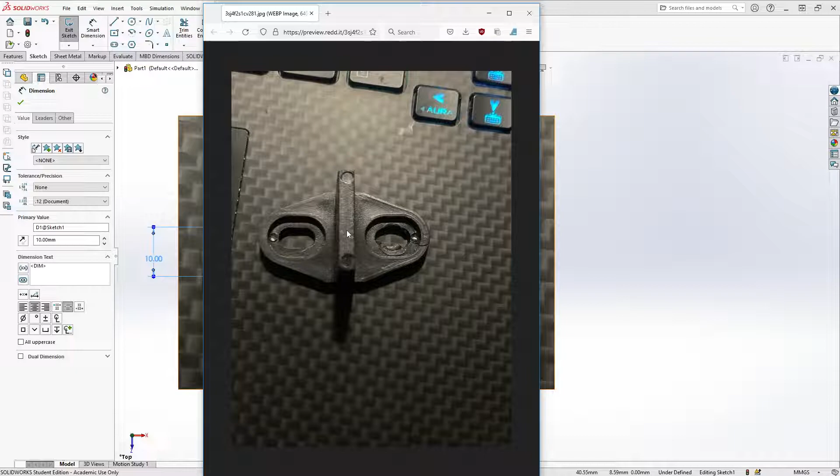And in Fusion there's a drawing tool that you can use to approximate a distance. The other suggestion is to take a picture more from on top, or even better on bottom, because you can measure what it is. And then what you also need are digital calipers.

So like something along these lines - not this one though, because that one sucks. This is the one that I bought twice. As you can tell, I've bought this one twice.

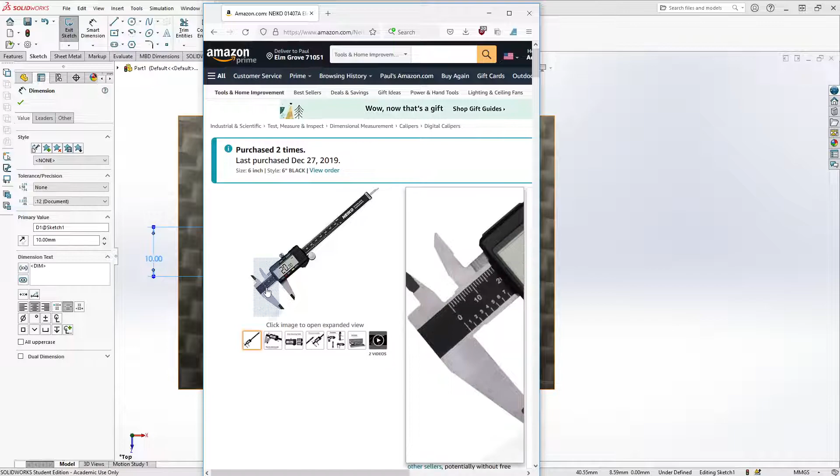But yeah, so you measure these things, and that way, whenever you put in the image, you could measure this distance and it would be whatever it is. So all of these lines are construction lines. They're colored a little bit differently in a different program.

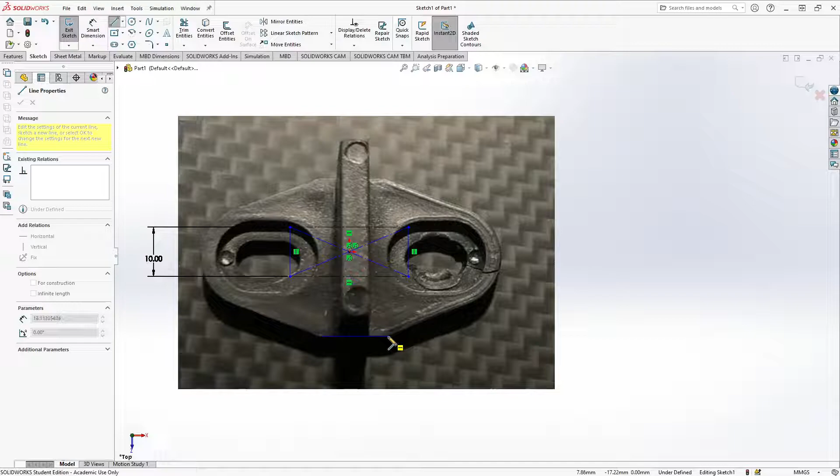So then what we can do is, if you notice, this shape is mirrored and it is sort of functional. So you can just go and draw a line there across and then press D for dimension, which I changed - in SolidWorks it's a different shortcut, but I changed it to the Fusion shortcut.

And so you can see it's 14.2, so we can round that to be 14, I'm sure. The thing about Chinese-made parts is that they're often going to be in millimeters, and it's going to be some standard size, so you can generally guess as to what it will be.

And then this distance from here, which we need to keep in mind - oops, what am I doing? I haven't used this program in like a week. We need to keep in mind that this is at an angle, so it's actually a little bit shorter. But so that's saying 31, 32.

So if we went something along the lines of, I don't know, 30, just as in the middle - by the way, center point - I'm going to go this way and do that, and then I'm going to dimension it to be 30. So that is 30 millimeters away.

Now you notice that it's already coming up quite a bit off. Your part's at an angle, so I'm guessing at dimensions and sizes. So even though I put this as 30, it might technically be something else. But that's something we'll get to when we get there.

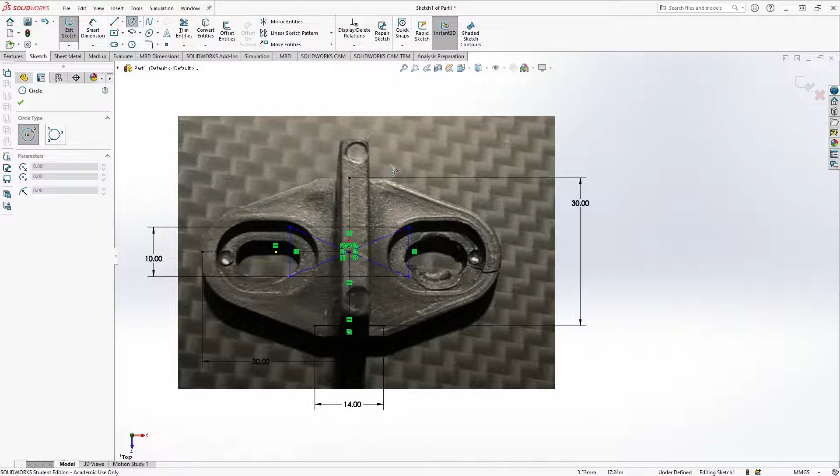That's because I'm going to be lazy and mirror this. But first, let's make this slot. In the software, they actually have slotting software where you can make a slot fairly easily. And then you take this, and that looks to be about the size. Oh my goodness, cooperate.

So we'd move this, or even better yet, we would press here. Oh, I get back into the sketch. We'd press here and here, make that coincident. Then we would move this around. I don't want to do that though, for reasons.

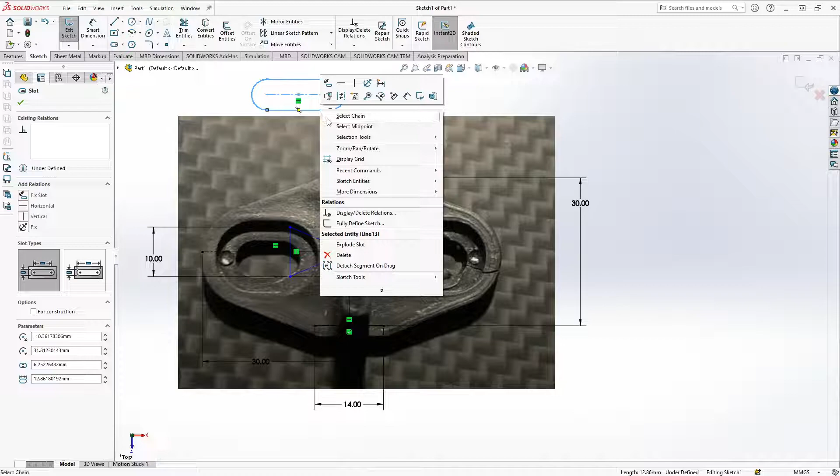I'll get back in there. Chain, that is one of the coolest features of this program, is selecting the chain. But anyway, so we're going to do some arcs, or even better, we'll do some circles.

So circle here, and now before we do it, you can also do a circle directly on this part to see about what it is, and the radius is about 3. So 6.

The radius and diameter are different. So now we can copy that circle, and we can get it to where it's about lined up and move it up. And so now these two are on the same line.

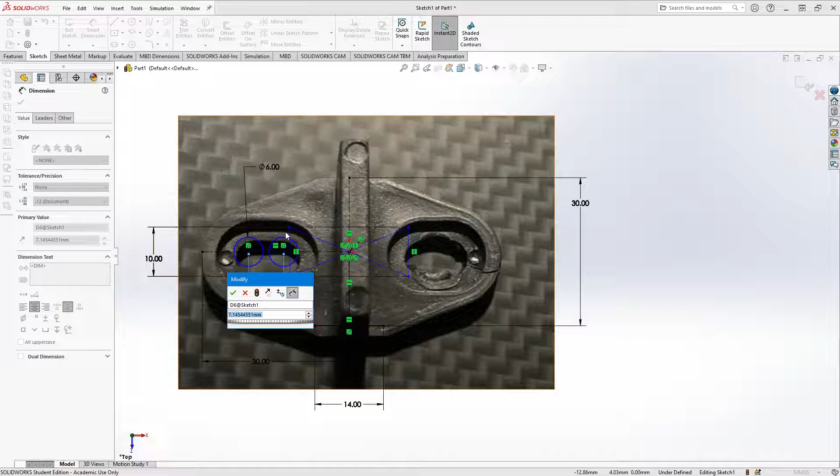Press D for dimension. Yeah, so this is showing a number that is relatively close to another number, so 7 millimeters. Important point, I'm working in millimeters because that always makes the most sense.

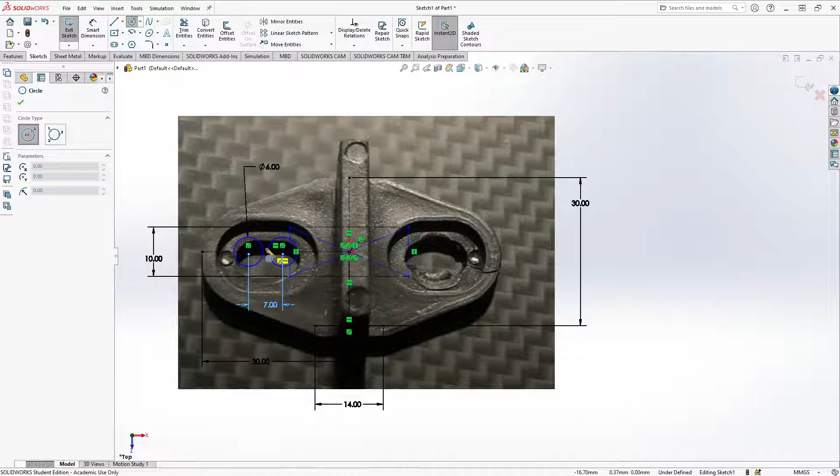So next we have a circle here, and notice how we're not doing... what do you call it... oh shoot, no. We are not doing... forgetting my words. We're not actually making them connected lines yet or anything like that. We're just doing the 2D sketch, we're going to be fixing that in a minute. But we can start with this guy. Actually, no, we're going to start with this.

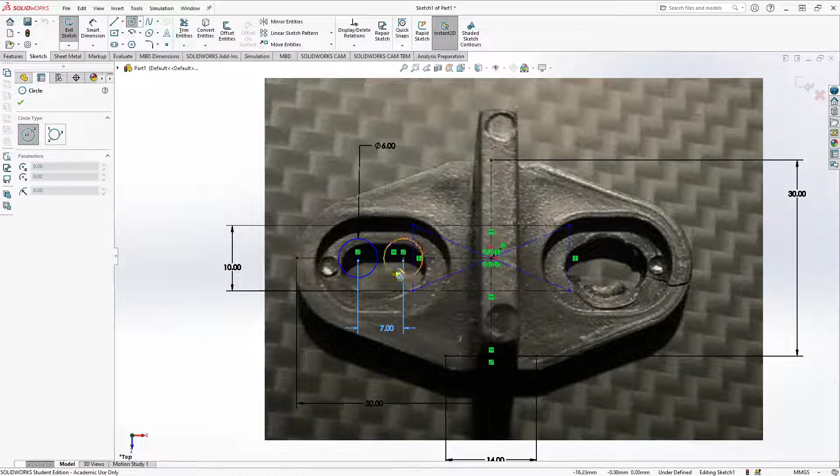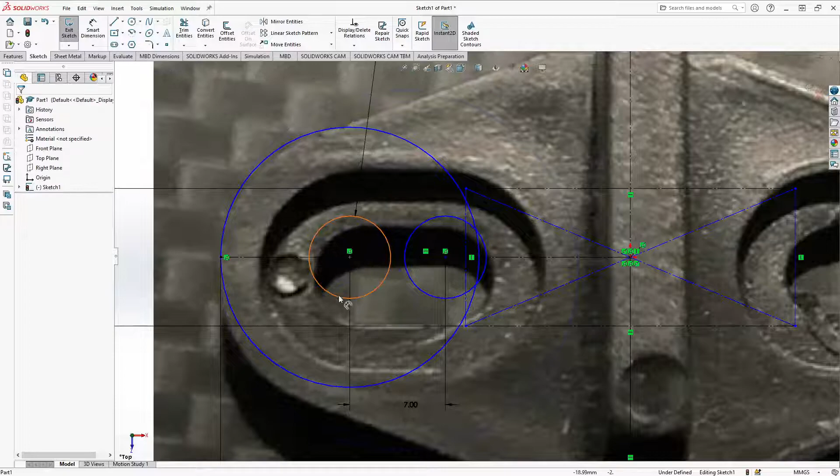So you notice how the circle for this ends in that point right there, and ends in this point. So that means that somewhere along here you have a sphere that ends right there. So I started a circle, and now this logically is going to go into here. But then it's going to become smaller, and that makes sense. So it would make sense that this circle and this circle, looking at this side, this curve and this curve would be concentric.

In other words, I'll show you concentricity. So that circle and this one and this one, they're all related. And then this one over here is related to the slot, but these are related to those first, and then this is related to the slot. We can get rid of these, don't need them.

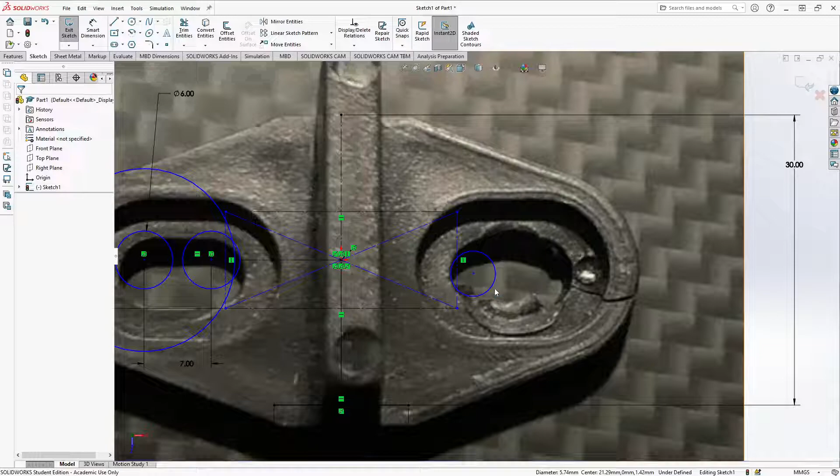Just illustrating the point. But this is sort of reverse engineering Chinese manufactured things. This is actually a really good example part to do this from. I've done something like this in my AutoCAD class like a dozen times or more so far. But anyway, so D for dimension, and you want to check this out.

Okay, so here's the problem. It could be 19 millimeters, but they never make anything 19 millimeters. It's 20. Sorry, it's 20. There's no way. Oh, hey, look.

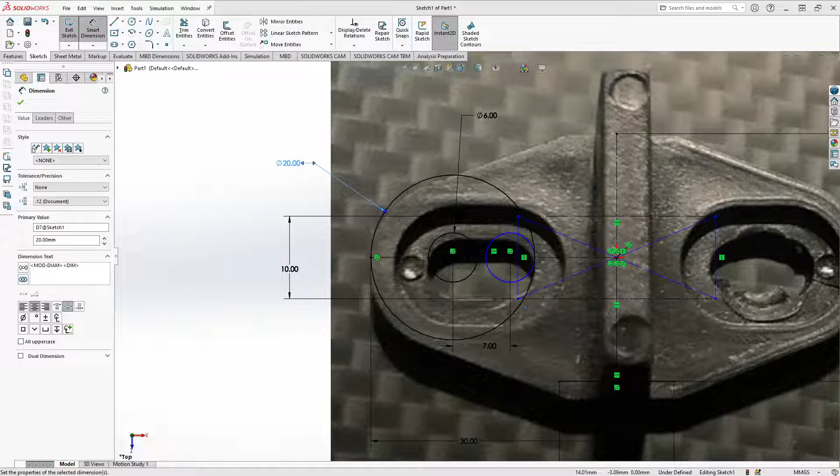Pause. I don't know if that paused or not. I think it did. Okay, anyway. So I know it's recording now.

But okay, so in summary, let's see, we have enough information. Well, we'll have enough information in a second.

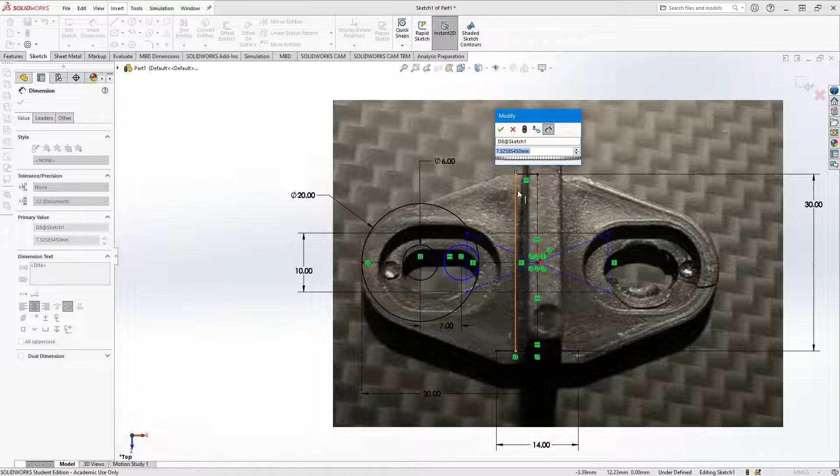Let me do a dimension here. So that's now dimensioning for the total length, not just for the part. So we'll do 7 millimeters. No,

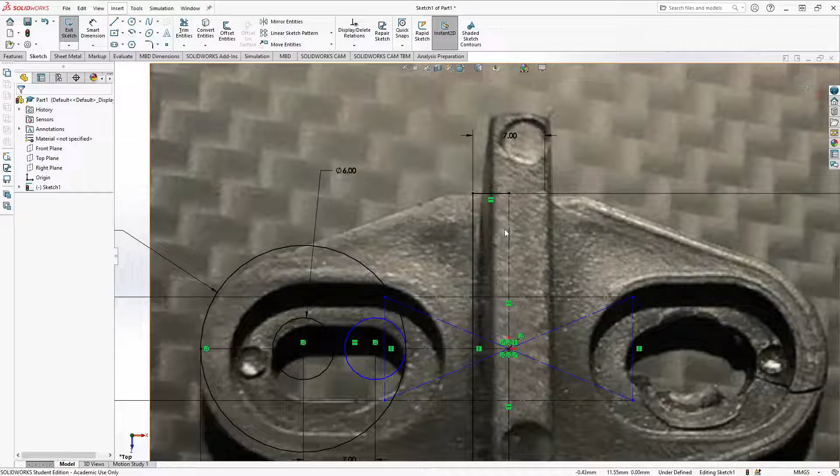7 millimeters. This is a feature of SolidWorks that I think is really cool. So this is recognized as a center line, so it's dimensioning from there to there. If you were dimensioning the same thing in Fusion, you'd do it from here to here, and it would be 3.5.

Yes. So okay, now I'll hide this son of a gun. Huh.

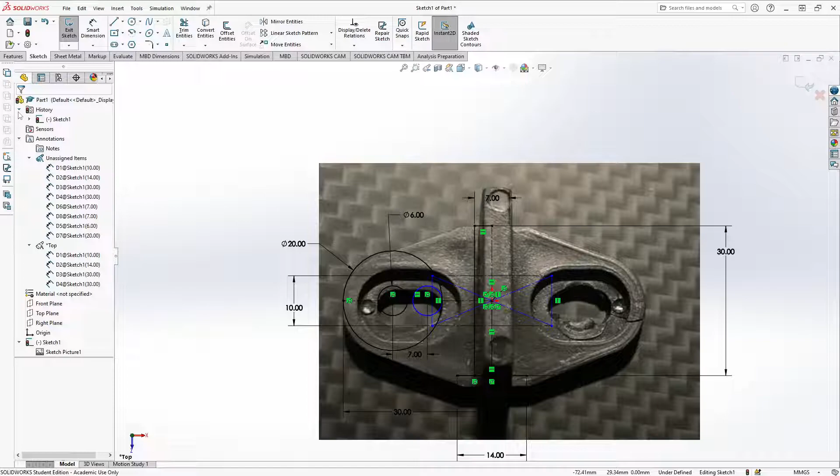Isn't it somewhere else? Oh my goodness. One second. Okay, I figured it out.

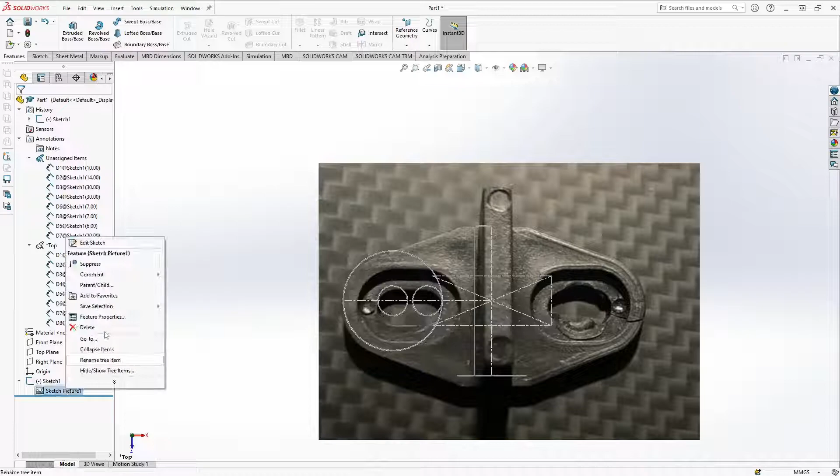I had to suppress this feature. Let's see, so we'll get it back by unsuppressing. That's really dumb - in Fusion it's easier. I had to do a full Google search. Oh no, hey, angles, come back. We want straight, we don't want angles yet.

Okay, so this is a gobbled mess, but we are almost done. Oh right, Dimension U will equal this in SolidWorks. You have to press the equal sign and then click another dimension. In Fusion, you just click another dimension whenever you press D.

So let's see, we'll delete this. You press - seriously, I have to delete off. Whatever, okay, so you press D for dimension. That's 6 millimeters. So then you press this one, and in Fusion you just click that.

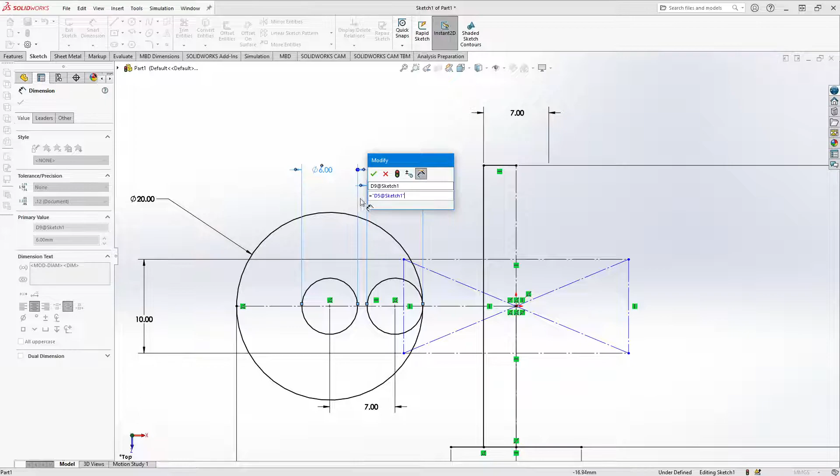Oh no, distance is set. Okay, so funny story - oh wow. Okay sorry, this is me geeking out over number stuff.

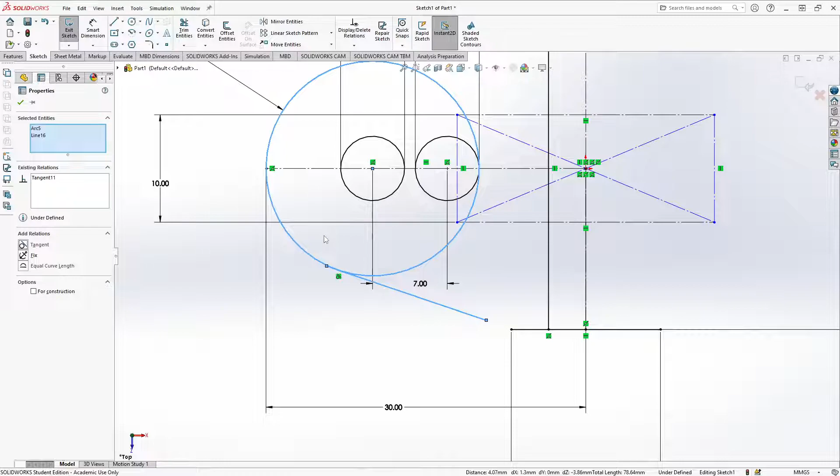Anyway, okay so next up, need to draw a line, and that line - doesn't matter where you put it. You can then select the circle and your line, and up here in SolidWorks there's a button that says tangency, like tangency relation. And so just now these two are now perfectly linked up - they're not linked up yet, but they touch, like in the most minute space.

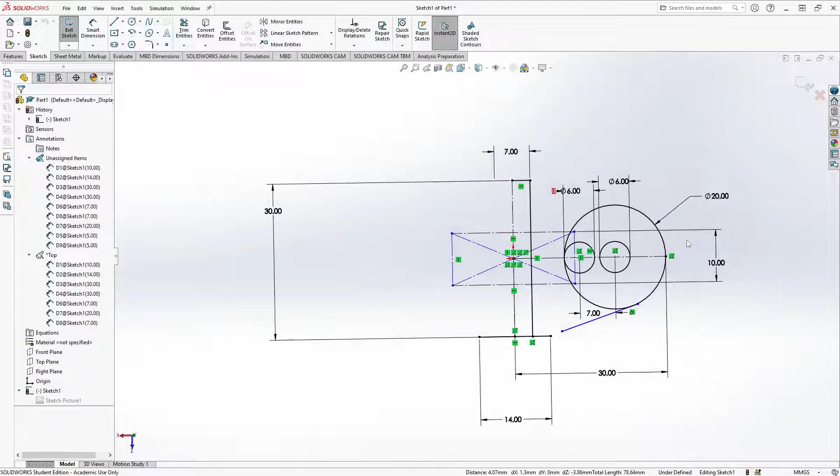Ah shoot, did that again. I'm so used to it working a little bit differently. I want this to be - I'm used to a different. I'm used to being able to pan with that button.

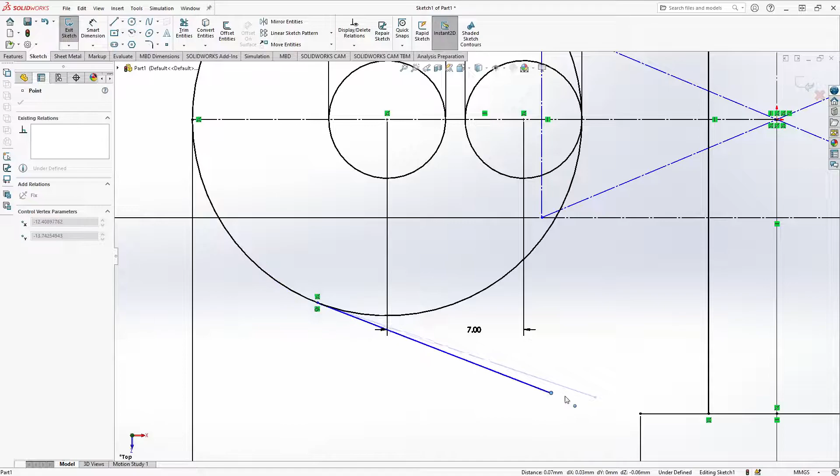Okay anyway, so now we need this point and this circle to be coincident. So now you notice you can move that around, and it looks like the Star Wars thing. But this is what they're talking about when they say tangency - it's tangent. So this is the crazy magic that they're talking about. Like tangency, it's so easy. Tangency, tangency, and you're like, well I don't know what tangency is. So, no, like just don't. Stop. Like, what? Okay, so then we are going to...

One of the features is called trim. Another one - oh yeah, a horizontal line, because we're making the slot. Again, there are other easier ways you can do this. Tangency - also to you and you, tangency. That's okay, it gets pissed off because it's already defined. I don't know if Fusion is going to get like that or not, because technically they're the same size, so technically they're both tangent.

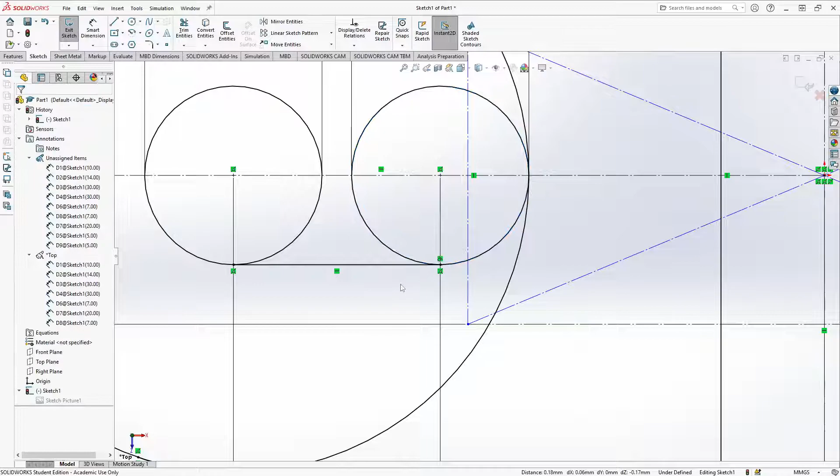Okay, fine, whatever, okay, coincident. So now both of these are attached, and it's just like over here, and they're perfectly attached. So next, we need this line here. We need that line there. And there's a whole bunch of extra junk, like this thing.

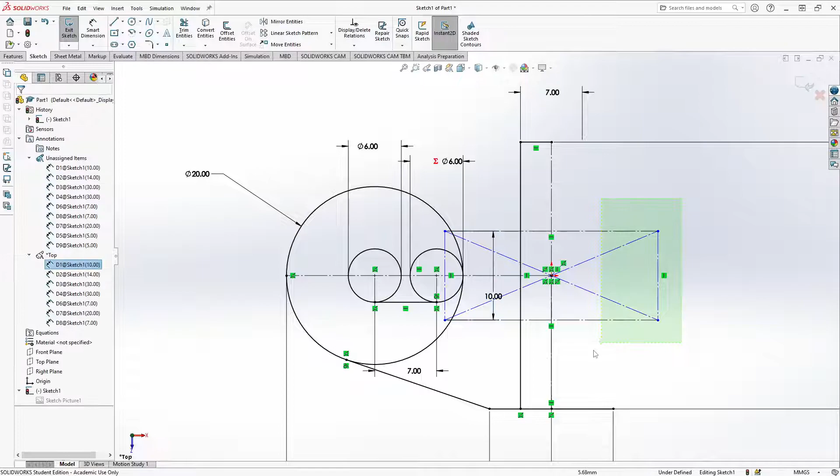We don't need this box anymore. Goodbye box, that's in the way. You, go away, I'm probably going to break something. Okay fine, we'll move you over here. You and you, coincident - that doesn't matter. Ignore this, maybe I can even delete that. I don't think it's going to care.

Yeah no, it doesn't care. It just knows that it's attached to this, and it's freaked out that it's going to lose it. Anyway, it didn't change anything.

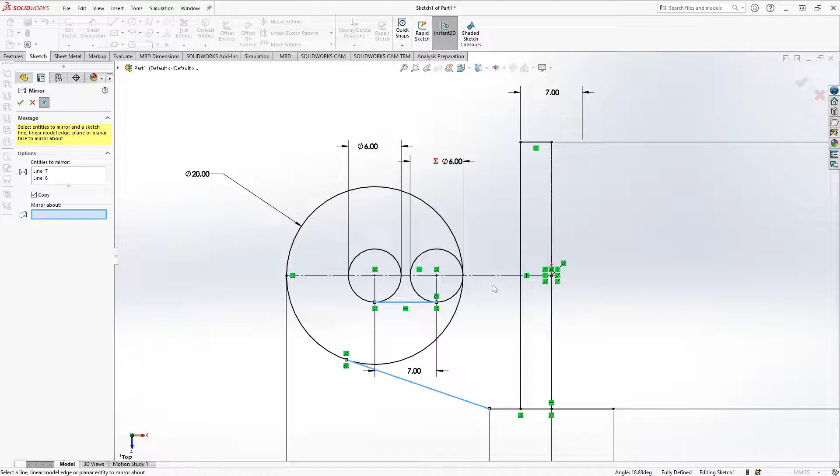So now we need to mirror. This is one of my favorite sketch features, also in Fusion 360, also. So mirror entities, and you want to mirror it about this guy. So maybe you'll need to select things. Oh right, also we need this line. Yes, great, now these are mirrored.

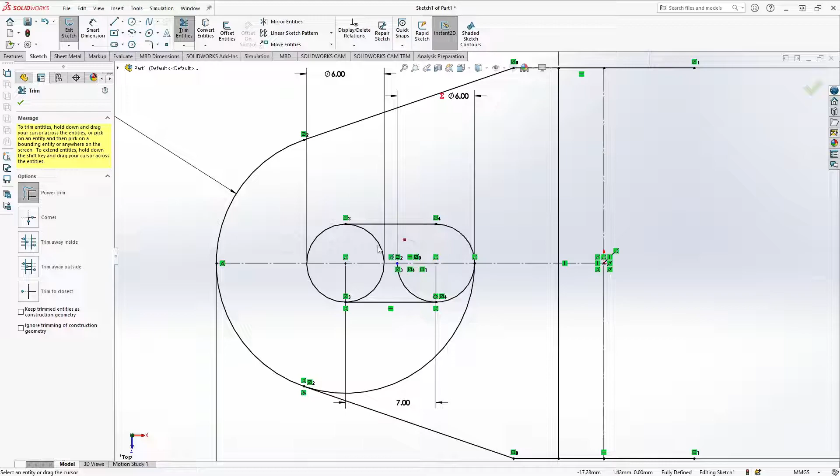And we're not done because we also need this side, and we need to trim some things away. So, done there, so trim entities. Now trimming - I don't remember exactly how it works in Fusion, but in this one it is relatively simple, like dragging across. You can also do things where you select trimming tools, like where this, let's see.

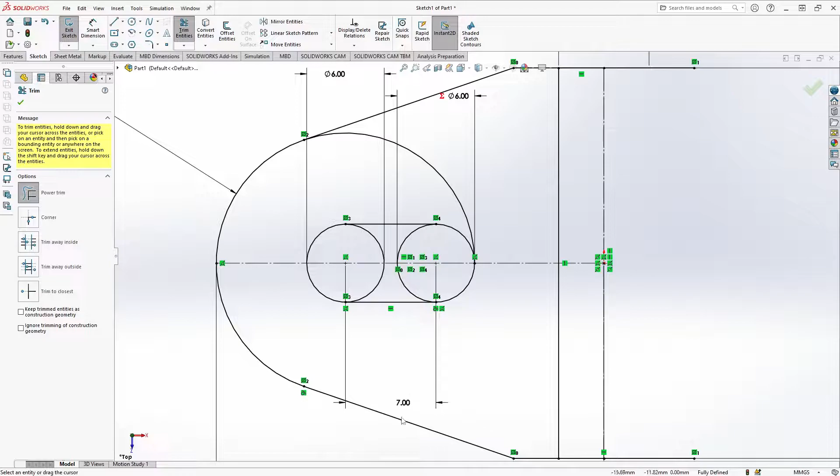So we could trim - I don't understand any of these trimming things. The easiest one is the power trim, but pretty much where you would select this as a trimming tool and this as a trimming tool, and then it'll remove this whole line. But what it does when it does the power one is it trimmed it using this line and that line, which is close enough to what I wanted.

Trim that, then over here, trim these, trim these. Great, so now what you have is a slot, and you have this. Oh, we need our other slot.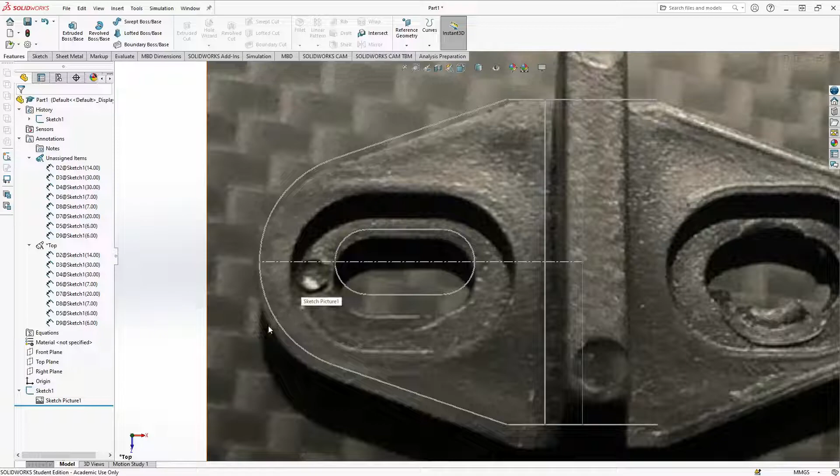Sketch. This is completely different than Fusion. So we have another slot here, and this is a certain distance away. Now there are many ways we could do this. We could do that whole thing again, or we can select everybody and go to offset entities.

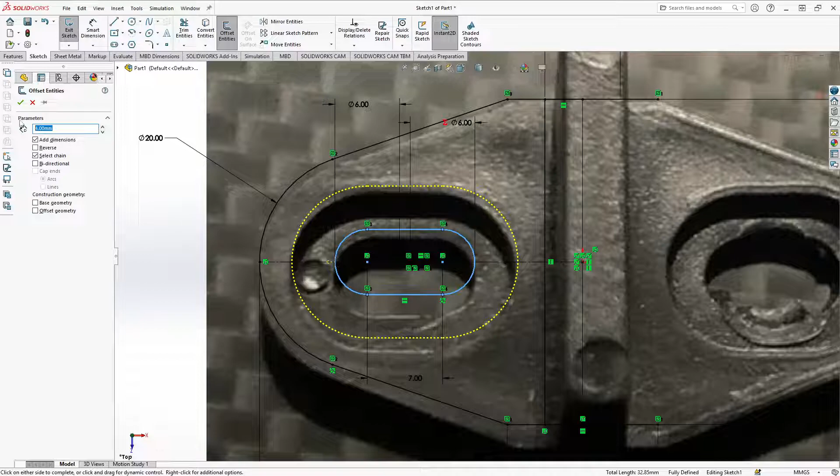Make this something reasonable, like 3, 4, 3.5. So again, I don't have your sketch, I don't have your full thing, I don't have the part on hand. Otherwise, I'd be measuring all of these things.

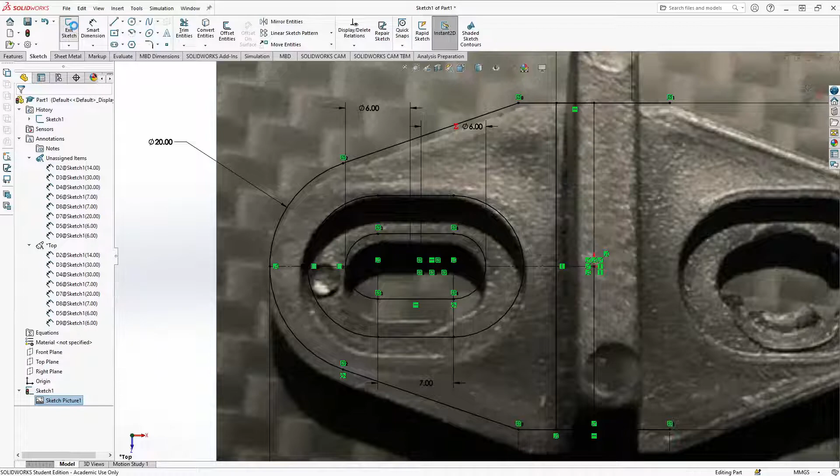Okay, great, there we go. That's close. Go away, because now we really don't need you. Suppress. Sketch. Sketch. Great. Okay, now so this line is in the exact middle of this, 14 millimeters across.

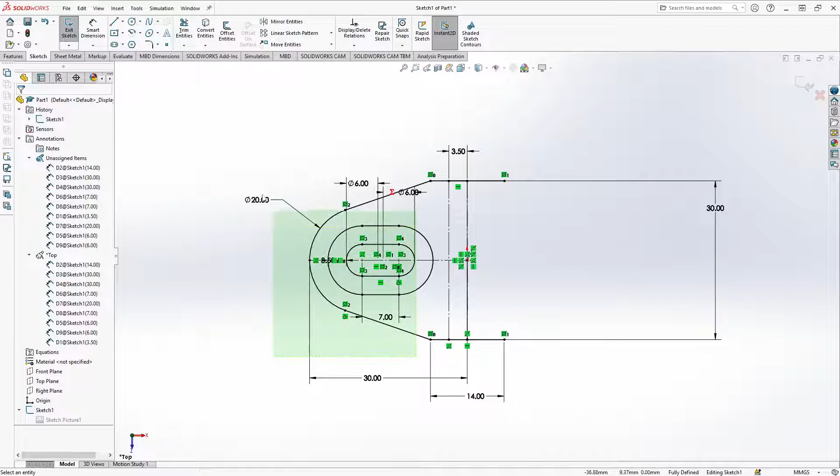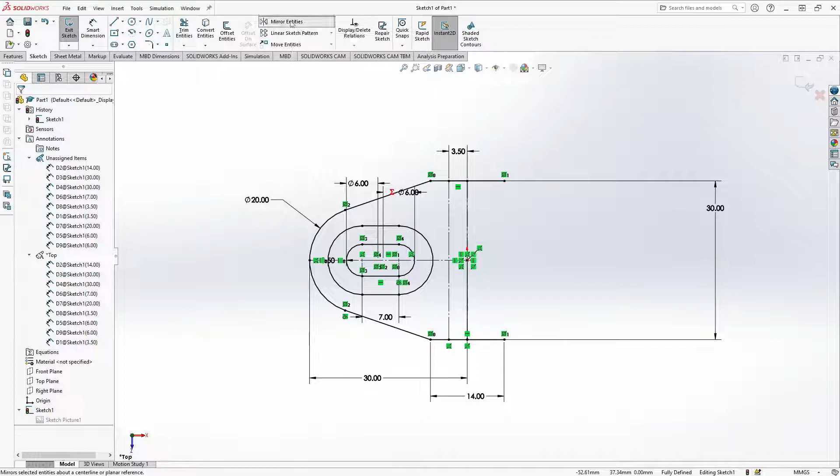Mirror entities again, because we've done all of this. Thank you so very much. Sorry, in SolidWorks it's sometimes really weird. If you select something and it assumes what your center is, it just exits the thing when I need to mirror it about something, but it's just me I see.

Yeah, anyway, okay, there we go. Mirror, right, done. Oh hey, also you. There's a similar menu in Fusion. But okay, it is mirrored.

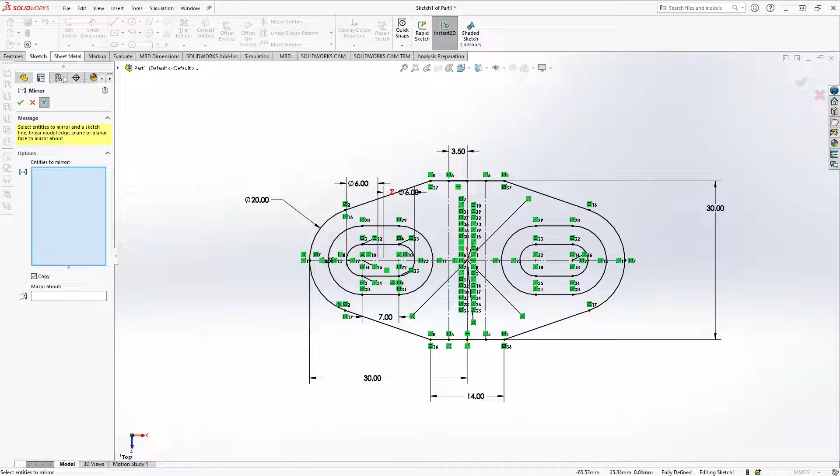I have no clue what those lines are. Yeah, just ignore those points in the middle. But anyway, exit sketch, and as you'll notice...

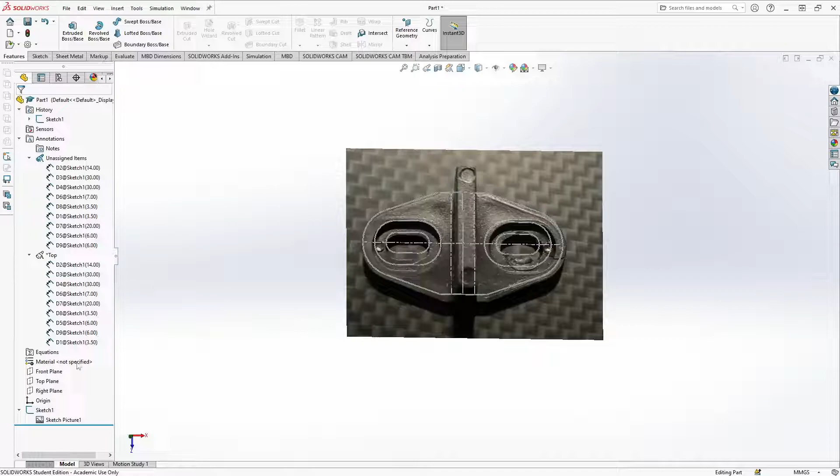We have a part here that greatly resembles this guy. So it's not exact because I don't have your part on hand. I would be using calipers to measure it, and I would be starting from measurements like here. I do this measurement, I do that measurement. So then it's the stuff that you probably already know.

Oh, this is where you'd, okay, I understand now. Okay, anyway, extrude boss base. I want it to be that surface. I don't want it to be all of those things. We want this and this.

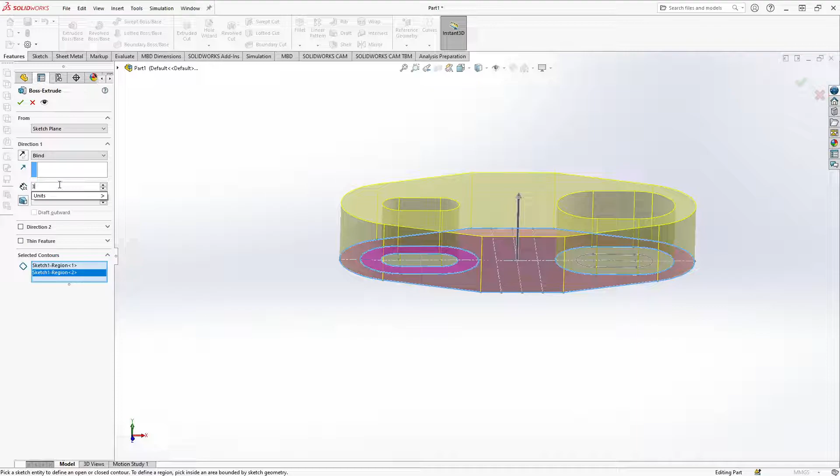Oh, I'm gonna make an assumption. We'll do total distance, looking at your image. Three? This is just guessing. Do 8. Okay, great, that's a guess. Only a guess. Then we need our slot.

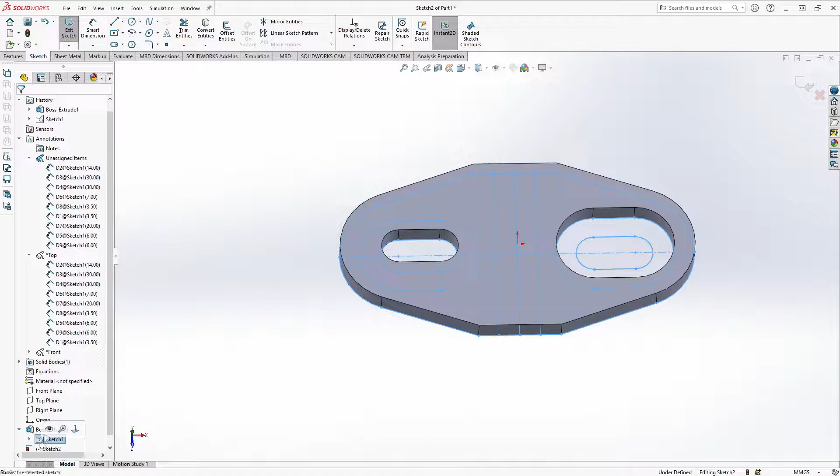In Fusion, what you would do is you would unhide your previous sketch, and then you would select the items. Oops, I didn't fully do my job. Edit feature. You too, thank you. Okay, great.

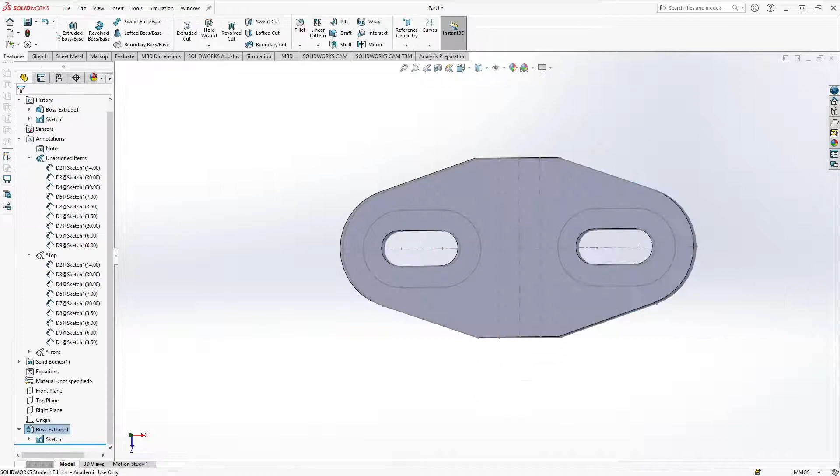Then, okay, so now I'm going to make a sketch on this surface. Sketch. And we can see this. So we'll select, not you, not you. Then, let's see, convert entities.

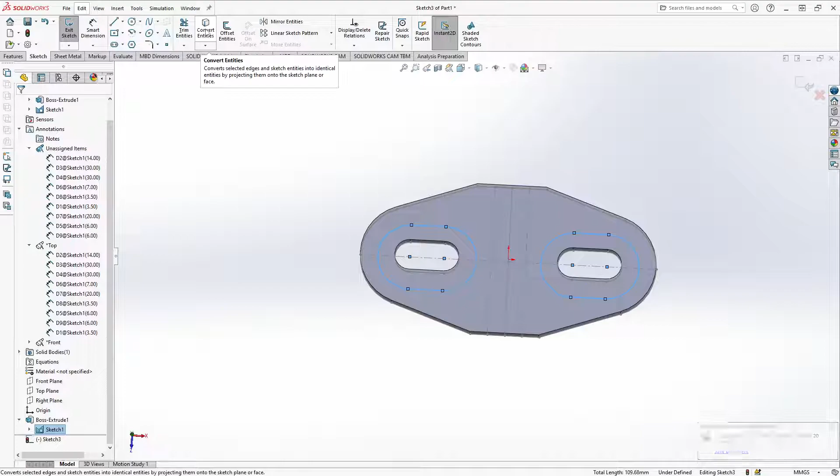In Fusion, it's P for project, because projecting is cool. Then again, convert entities for your surface. So we converted 2 separate entities. We converted the sketch entities. Oh hey, also you guys. Well, we'll do that later, that's next step. You want to do as few steps in each thing as you can.

So great, we have those shapes. We have these shapes. Those are confirmed projected, right? Convert entities. Oh no, they're not. SolidWorks and Fusion are different, so yeah, for entities it's converted. Okay, exit sketch.

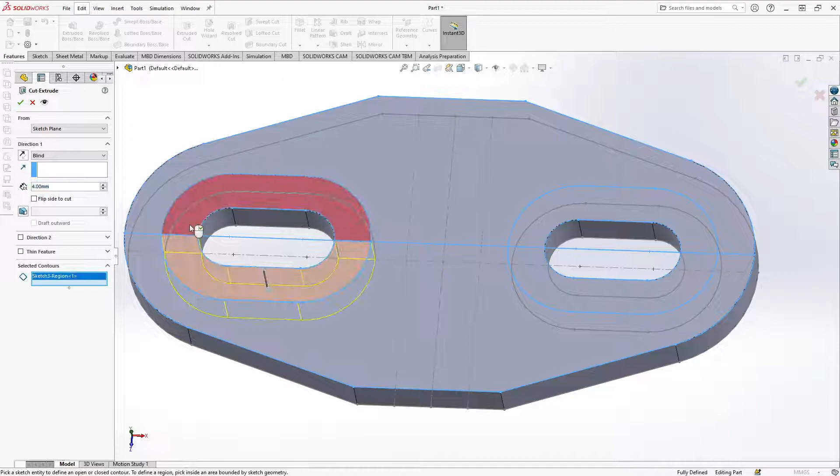Then now in Fusion, you can just do extrude boss base and extrude, and you can also cut in that. Can't do that here. Okay, cut in. Slide, you.

Oh hey, actually come back. So you, all right, sketch up here. You and you, convert entities. You and you. No, we're not going to do that. We're just going to draw lines.

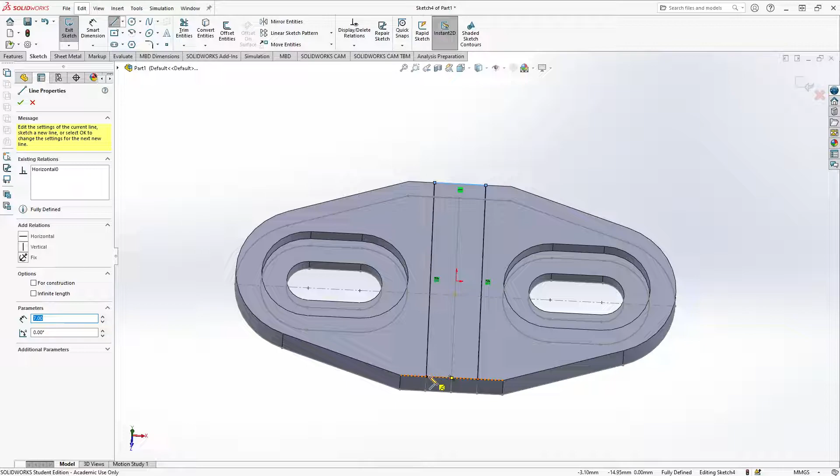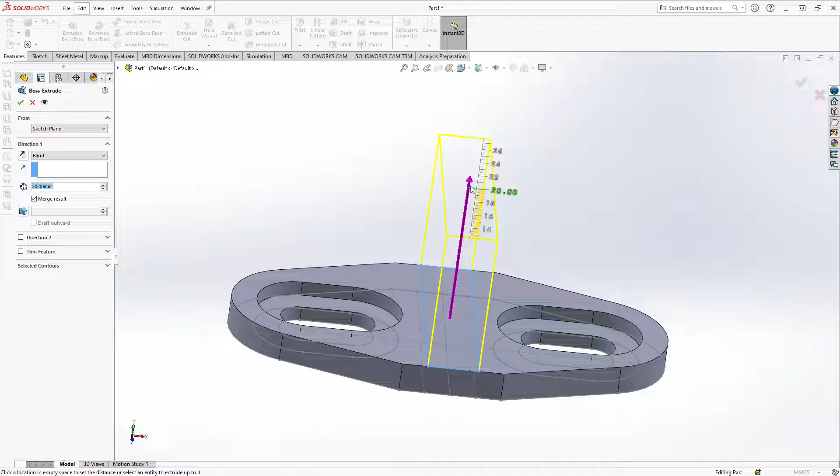Fusion doesn't care about that. You could just project these lines, and it's like, oh look, a box. SolidWorks can be iffy. So then, boss base right here, and I can't tell from the part, but I'm gonna guess 20 millimeters. That's an educated guess.

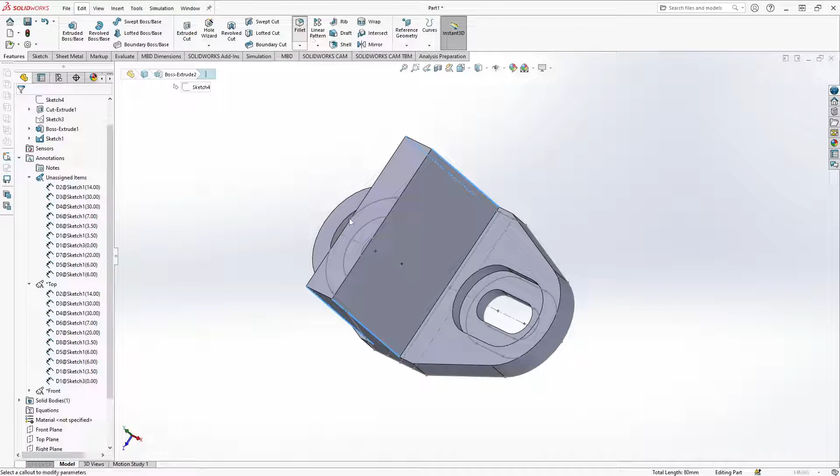Then you have fillets. So select your shapes, and F for fillet. Okay, fillet. F for fillet works in there. I might have changed the shortcut key. 2 millimeters, that looks about right. And you now have your part.

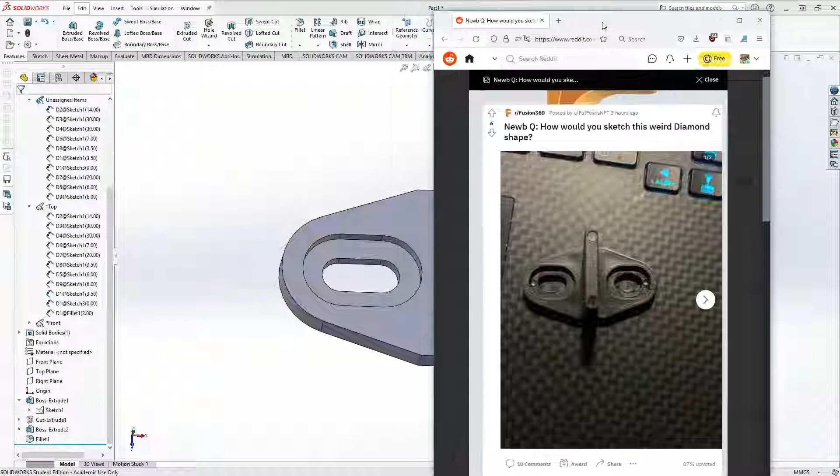Oh no, you can see my name. I'm joking because I'm like I'm the one who's sharing this.

But anyway, so yeah, you have your part, and that very closely matches. It might not be exact, but this is where calipers come in. You can also see this is an injection molded part. See those points there? So flat base. The body was the negative of this. Yeah, so that about does it.

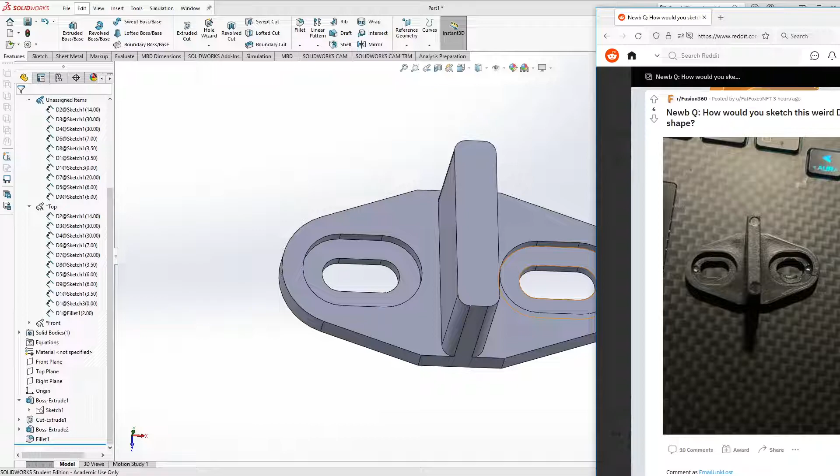Where's OBS? Here you are. Stop recording.